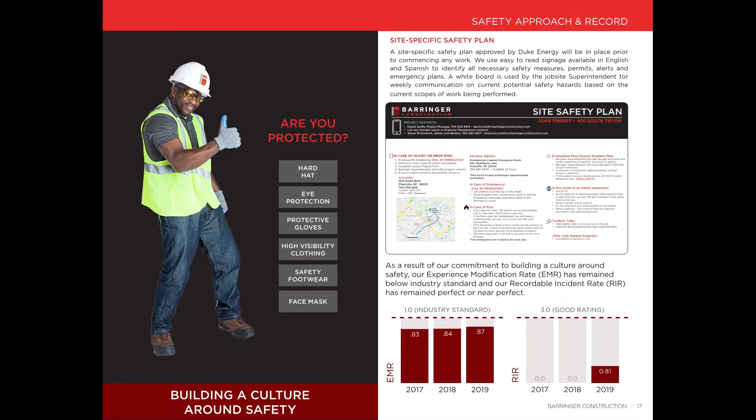It talks about the type of safety we do. Here at Barringer, we're really big on branding. You can see we've got the safety imagery. I just wanted to make a quick side note - one other piece of any company, architecture, construction, anything like that, is the marketing. This presentation was not put together by a project manager, estimator, or superintendent. We have dedicated marketing staff. So if you're interested in design, but maybe not necessarily designing a building, and like the creative aspect, you could go into marketing as well.

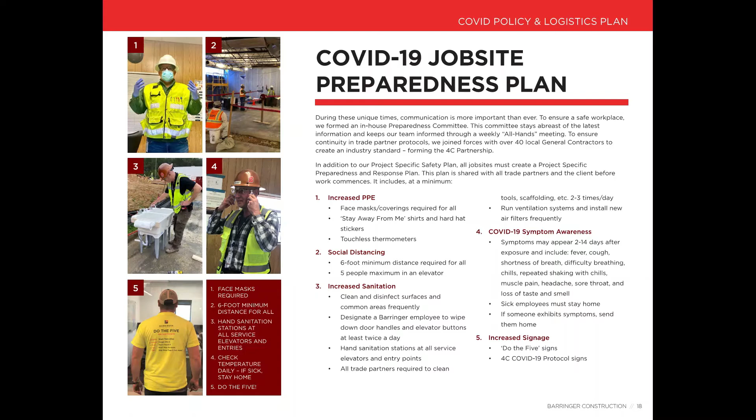We present that to them, and if they like all of that, then we move forward into the construction phase. Project turnover is when the job is complete and we give them their final documentation. Then post-construction, most general contractors give a minimum of a 1-year warranty on all of their work. So if our clients have any issues or any products not working, they can give us a call and we will be right back there to help them out.

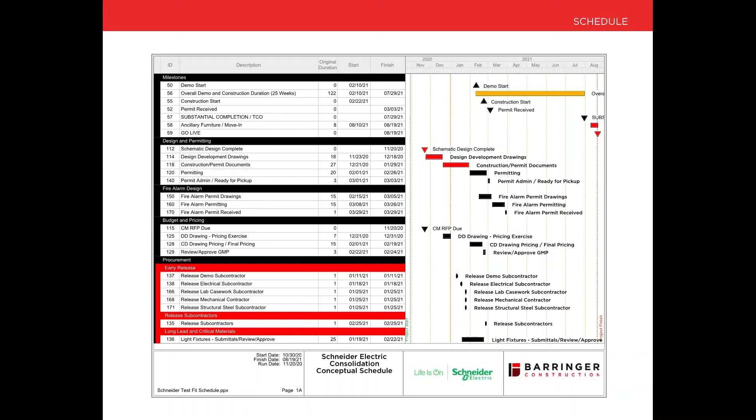And then lastly, they have the schedule and a cost estimate included. So that's why this is so important to help win us work, to see a schedule built before we actually win the job. This is one more breakdown showing the budgeting process, and this is another example.

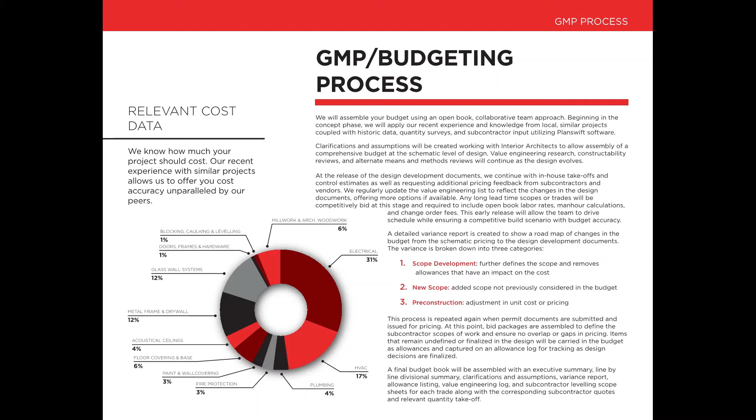Instead of having just a straight up estimate, this is showing where the money is going percentage-wise. So for this job, a huge portion of that is electrical, and that tends to be true for most jobs. The mechanical, electrical, and plumbing tend to be some of the highest budget numbers, along with the metal, drywall, and framing, because those are the biggest key elements to make a building, office space, whatever we're doing, function properly.

So why do we do this? For money? No, I'm just kidding. That's not why we do cost estimating and scheduling. Really, why we do this is to understand the project. If we do not go through these things thoroughly, figure out how much this project is going to cost, and figure out how long it's going to take, we cannot properly do our job, and we cannot properly set the client's expectations.

Another good advantage to regularly doing cost estimating and scheduling is that if someone calls us up and says, hey, I'm interested in doing this, but I don't really have anything figured out, would you be able to send me a rough budget? Basically, from doing all of these estimates over time, you can create a database, and internally you end up taking this as knowledge that you could off the top of your head say, oh okay, you're looking to do this, that'll probably take you about 6 months, and then it would be roughly X price per square footage. My boss just had a phone call like that today.

But lastly, of course we do need to do this to win jobs, but that is not the sole purpose of this. The sole purpose of this is to understand your project, because that is so key to avoiding any mistakes, keeping your client happy, and delivering a great product.

So, how do I make a cost estimate? The biggest, crucial, most important thing that you have to do is read the plans. Once you go through and read the plans, read all the text, don't just look at the images. You've got to go through everything. Architects make their plans differently. There are no universal plans. So from there, some architects might put something in one place or put it in a different place. You've got to look through things thoroughly to make sure that you've got everything covered.

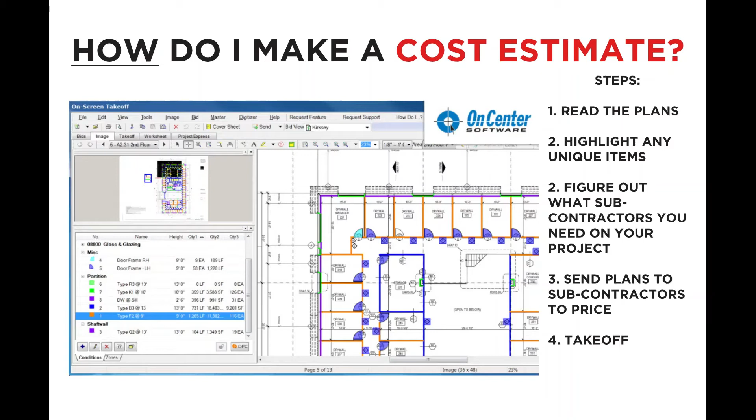That takeoff then helps you to compare pricing with the subcontractor's bids, because now you have a very thorough understanding of everything that's in your project. So you take all of the subcontractors' bids and literally put them next to each other, line item by line item. Did they get everything that you wanted?

So then after the schedule is created, because this is being done at the same time that an estimate is being done, you need to go ahead and figure out your general conditions. So general conditions are your overhead - that's my salary involved in the job, the project manager's salary, the superintendent's salary. But then you've got, how many dumpsters do you need if you're doing demolition? Do you need any additional cleaning crews? What's our project fee, etc. There's a bunch of items like that that come into play in general conditions.

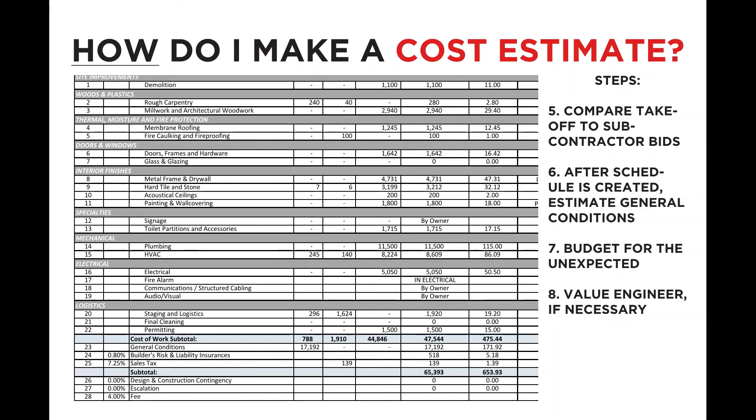As I said previously, at the same time an estimate's being created, a schedule is being created as well. The number one most important step is you need to read the plans. At the same time the estimator has sent out plans to the subcontractor, you don't need to do it twice, but you just need to ensure that all of the plans have been sent to all of the subcontractors that are going to be involved.

Once you get your scheduling program, there are many different types. This is Phoenix. I know Microsoft Project has a good one. I've heard of a few online-based ones, but I don't know the names off the top of my head. There are multiple different scheduling programs.

You want to set your target start date, and then just kind of do a brain dump. You list every construction item that needs to occur. So you'll see down at the bottom left, we've got demolition, install shoring for a staircase opening. Shoring is temporary structural support. Saw cut, dig and inspect the footings that you just cut out and repoured. Wall layout, then frame walls, in-wall rough-in, install ductwork and interior mechanical equipment, install stairs, frame hard ceilings. You just want to do a brain dump. This doesn't have to be in any particular order. Just think about every single construction action item that needs to occur on this job site.

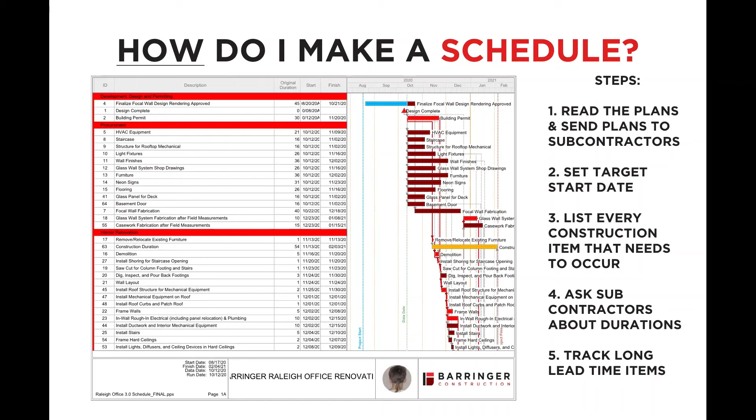Just to zoom in a little further, there's three main parts of a schedule. You've got your development, design, and permitting, which would be the dates leading up to your start date. So you can talk about when you want your architect to be done with their design, when you're going to submit it for building permit, how long you plan for that to take, which then sets your target date to start. From there, you want to put in your procurement, which is a fancy word for tracking your long lead time items. How long will it take you to procure your materials in order to actually build this project?

Then you've got your actual project timeline. So after you've gone through and done a brain dump of all your action items and figured out the durations, you put them in order according to the general construction process, and the scheduling program will then put a date out at the end.

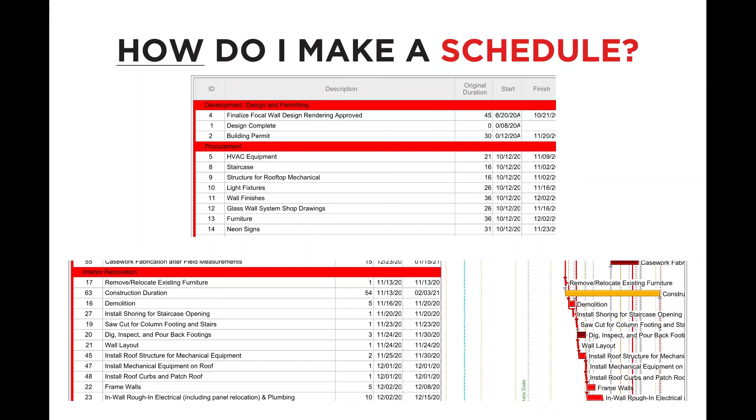So how do you make your cost estimate? If you go online, this is what your project looks like, your assignment or your next activity looks like.

We're going to zoom in here and show you the material rates at the bottom. That first image was at the top of your assignment, and this is at the bottom, showing all the different materials you can have and their going rates. You're not actually going to need to call any subcontractors. This is for your activity.

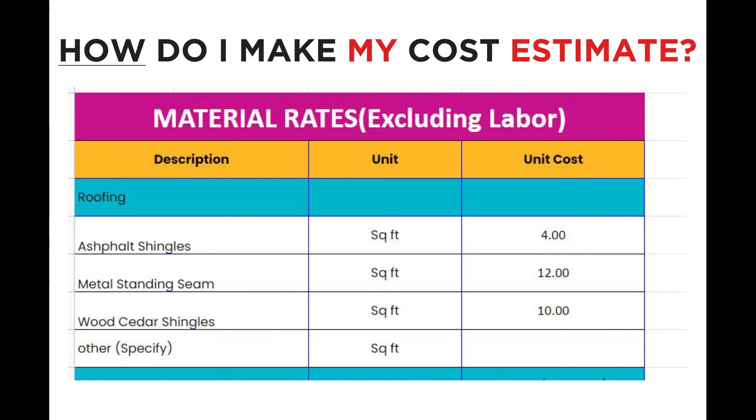What I had mentioned previously is how we do our work in the commercial sector. Let's go back up to the top, and you can see the column headers are the description of the product, and the unit, which quantifies how you calculate this product.

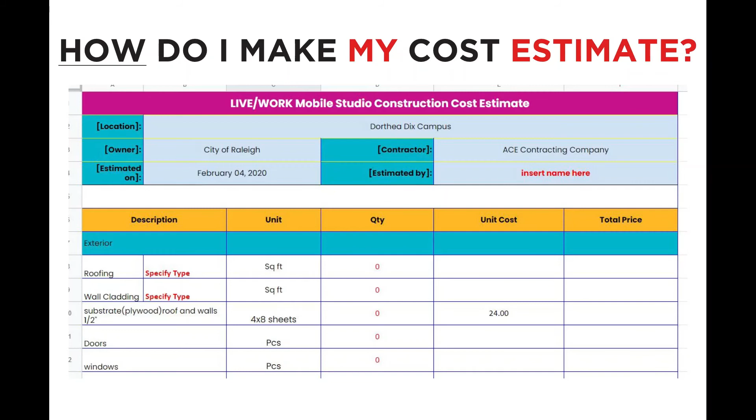You've got the quantity, the unit cost, and the total price. From there, we're going to focus on bathroom tile, so they want us to specify the product type. Square footage is how this is quantified, and that's how you go ahead and order the amount of tile you need per square foot. The unit cost we're going to determine from our unit rates at the bottom of our assignment, and this automatically calculates the total cost for us at the end.

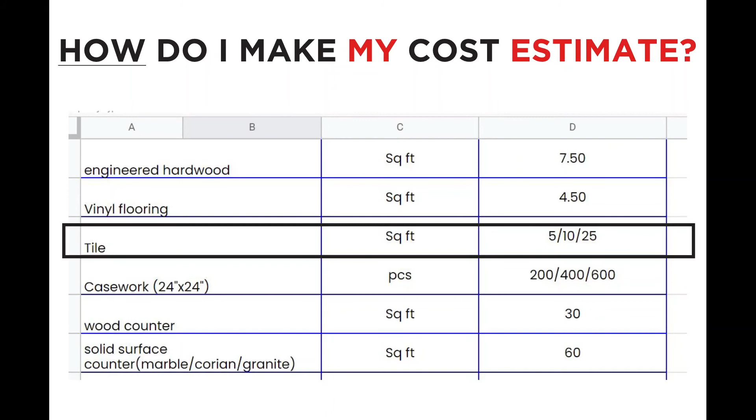So we've got bathroom tile. I've chosen the medium grade. You can see the tiles got 5, 10, and 25. If you were zoomed out, you'd see that those lines are dividing between the different grades of material. So the mid-grade has a $10 unit cost.

In order to determine my square footage, I'm going to do a takeoff of my project. So I highlighted the bathroom. Granted, it's not showing me the exterior wall dimensions, so the 8-foot dimension of the bathroom, the long dimension, is technically a little bit off, but it's better to have more material than less material. As you can see at the top from the dimension string, the bathroom is 2 foot 10 wide. Easiest thing to do is to convert the dimension into inches.

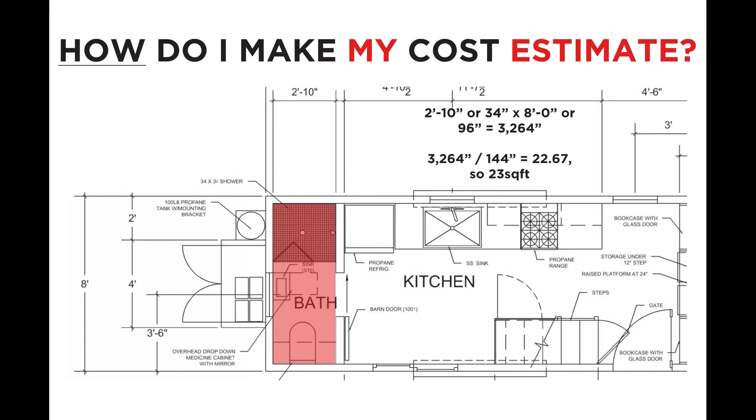So 2 foot 10 is 34 inches, 8 feet is 96 inches. I multiplied them together to get 3,264 inches. Then you want to divide it by 144 inches, which brings us to 22.67, which I rounded up to 23 square feet. Regardless of if it's 22.1 or 22.7, round up every time.

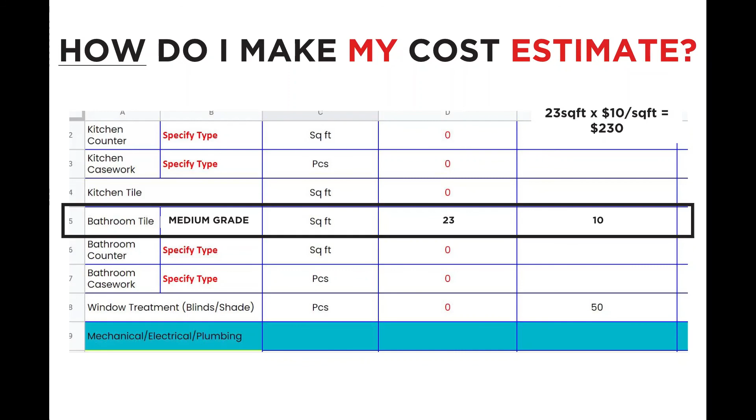From there, I go ahead and enter that I've got 23 square feet of medium grade tile at $10 a square foot. So when you multiply 23 square feet times 10, it equals 230, which I believe the file does for you automatically, and then it'll total everything at the bottom. In this file, you do not have to calculate fees or general conditions or the cost of labor to build, which is essentially all wrapped up into one. They've got that pre-programmed for you, so all you have to focus on is your material selection and the quantities of it.

In summary, how to create a cost estimate: you need to learn your plans, share the plans with the subcontractors, quantify (which is what we did before), count everything as you go, figure out size, shape, scale, budget for any items that aren't covered, determine length of project from schedule, qualify subcontractors through phone calls, and then compile a final price.

For a schedule, again, the number one key important thing is to learn the plans. You share the plans with the subcontractors, call the subs to find out durations and material lead times. You input construction items into the scheduling program, and like I said, I kind of do that as a brain dump and then adjust accordingly to a typical construction process. I'm going to add the durations to each item, those durations you've learned from calling the subcontractors, and you need to determine what items drive the schedule.

Like we talked about, if your sink is a custom-made sink and is going to take 15 weeks to come in, then you cannot install your sink until that point. So when you make your schedule and you've got your sink going in after, say, a month, that's not going to work out. You've got to adjust your schedule accordingly, and that'll set your target completion.

I know that was a lot of info tonight, but by no means should you be overwhelmed by all this information, because you do not need to go to this level of detail. You just need to pick out your materials, figure out your square footage of everything, and then from there it'll calculate your price based on the material selection that you have. Then you'll be able to see how much your idea might cost if you ever decided to build it.